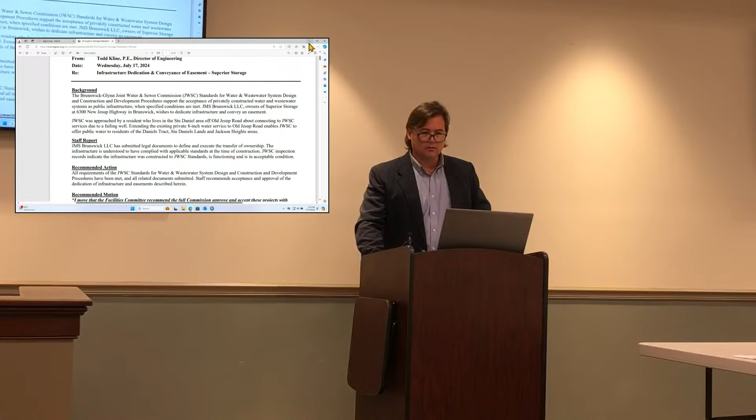I'll turn on, visualize it a little bit better.

Okay, Superior Storage business here, private water line that was installed by their forces back when this was developed, this project. It stops just short, there's two separate parcels, one parcel here, second parcel here. The water line stops just short of Old Jesup Road.

We were approached by a resident that's on a private well off of Old Jesup Road. There's currently no public water infrastructure in this location. We took a look around, trying to see how we may be able to accommodate this desired customer, and we saw this as an opportunity.

Superior Storage did install this line here as a fire line primarily, but their potable also comes off of it. We approached Superior Storage and through a lot of negotiations and communications with them, particularly through the efforts of Mr. Dormany's office, we were finally able to settle in on an easement, two easements. One easement for the first piece of property, second piece of property, and then also dedication of the water line itself. That'll get us to Old Jesup Road with a little bit more effort in-house likely for distribution, possibly to extend the water line.

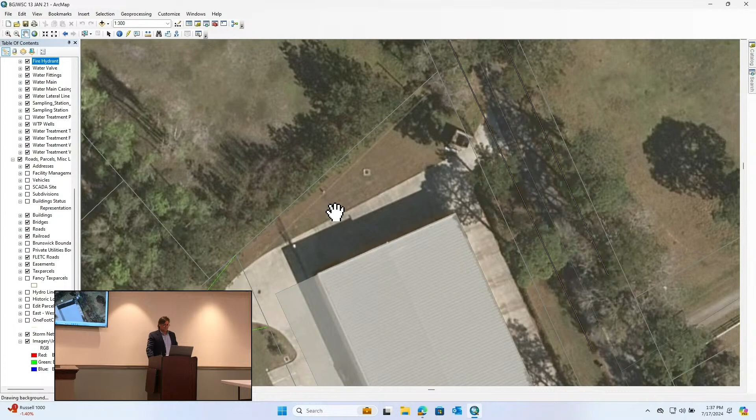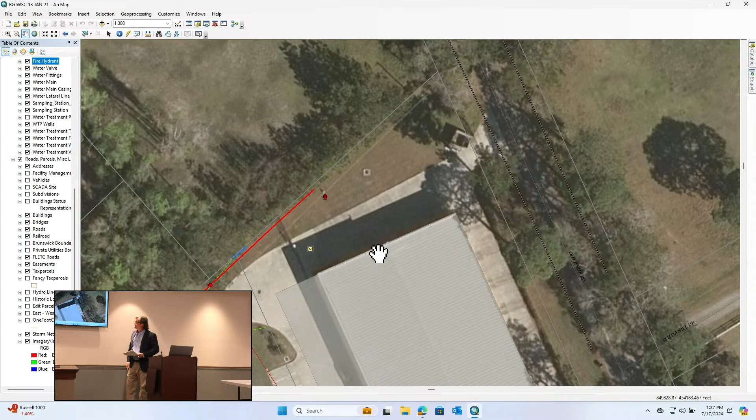Once we get the easement and the water line extend on out to Old Jesup right-of-way, then we can branch either way to pick up new customers. So that's the history and background and why we would consider this.

Infrastructure was inspected back when it was installed. Records indicate we've got record drawings for it. It's 300 and something feet, a little over 300 linear feet of 8-inch C900 PVC pipe, meets our current standards.

And then also the two water easements. Documents are included in the back for reference, two easement plats. And then tomorrow you'll see the dedication document. I don't think you'll see it in the packet today.

What year was that installed? Do you have an idea? That is a good question. It's a little over 10 years old, I believe. Okay, it's been in the ground a little while.

Can I have a motion? One thing to note, we are not getting a warranty with this dedication because they're outside of what would be the normal warranty period, because it was never going to be dedicated. So as part of the dedication, they are not providing a warranty, but given the access to Old Jesup, staff feels that's acceptable. But right now it's a private line, right?

Currently, it is privately owned and maintained. And where's their meter? If it doesn't show on here, it's a yellow dot by the corner of the building. Oh, there it is, okay.

So they use it for a fire line too? Yes. Do they have a fire meter, a fire line meter? No, sir, we don't have meters on fire lines. Fire lines are direct connections with backflow preventers on them, and they pay a monthly fire protection charge for that. Do they do that right now? Yes.

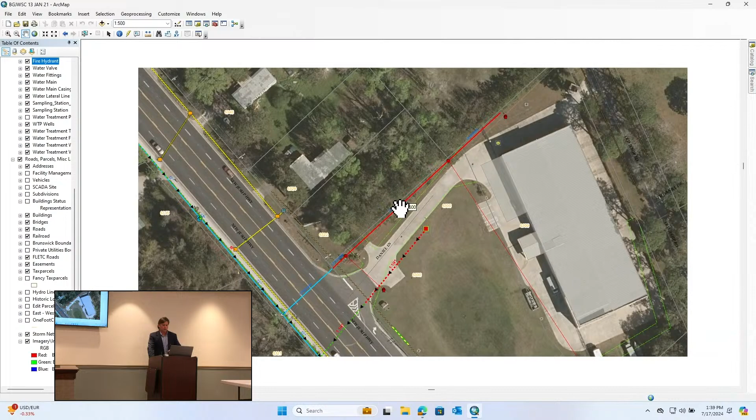Got it. Let me turn off the, maybe this will help clear it up just a little bit. There we go. So the building footprint here, Superior Storage, this is all, right now, it's a storm retainage area.

Joint water, this is public line across 341, that had to be public, right of way to right of way. Once it went on the private property side, it became private. Okay, so they've got one fire hydrant lateral that stubs off here, and the fire line extends all the way here. Another fire hydrant here at the end, and the potable meter is up here.

I would imagine they, rather than running a separate and independent fire line only, it made sense to folks to approve this plan, to at least get a little bit of usage on this line, keep the water moving. So there's quite a lot of potable using off of that. Sometimes you'll see separate independent water and fire lines run, particularly if it connects for a fire suppression system here, which I don't see a backflow in there, so.

And somebody else has already requested water, right? Yes. Somebody down Old Jesup in the neighborhood, kind of to the east there. So would we loop that line back around?

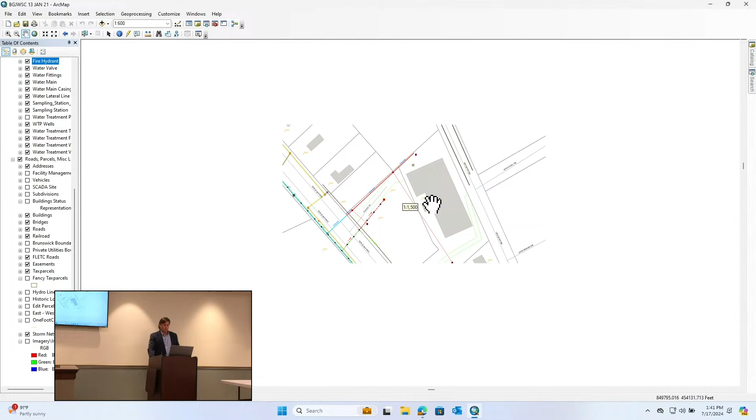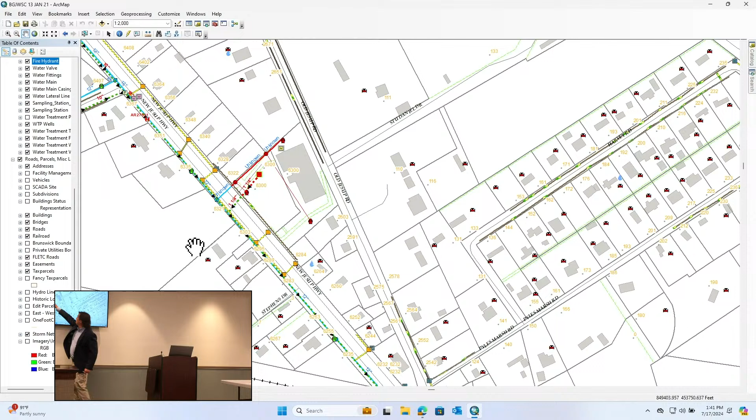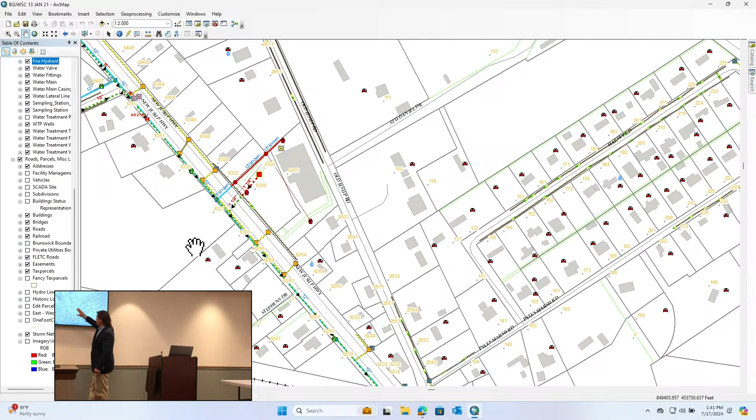Right now, it would likely be a dead-end line coming from New Jesup through here. Old Jesup, we'd stub out about that way, and then stub out down here. I don't remember the exact address, but it's one of these units here that was requesting it. They're having some issues with it though. So now they would be responsible for running the water main line to their doorstep, unless they were able to work out a common project with them. But we would probably look for a loop sometime in the future, a capital project, add it to a project list.

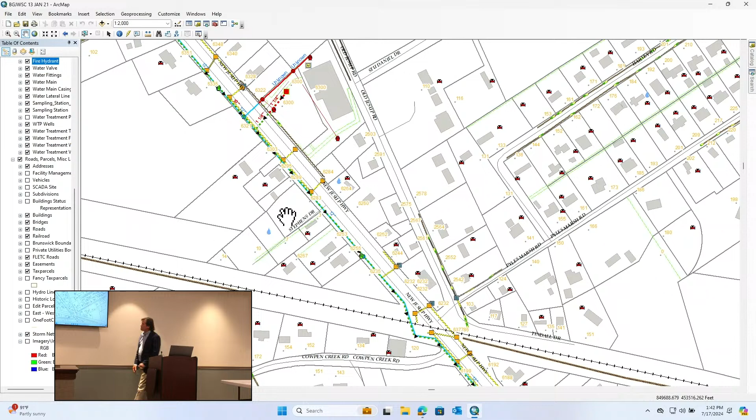Can we see where the water lines are on that map? I'm not sure what's clear on them, where the existing water lines are. Let me turn sewer off because it's kind of overlaying. So let me turn storm off too.

Is there any private water systems right in there? There are, yes sir. So if you see, when I turn sewer off, I turned off the septic tanks. Let me show you, turn it back on so it's apparent.

Stub out there, and that's it. And then you're gonna run a service line all the way to his house down Old Jesup? That would be right, so about 120 or so feet to get to the right of way.

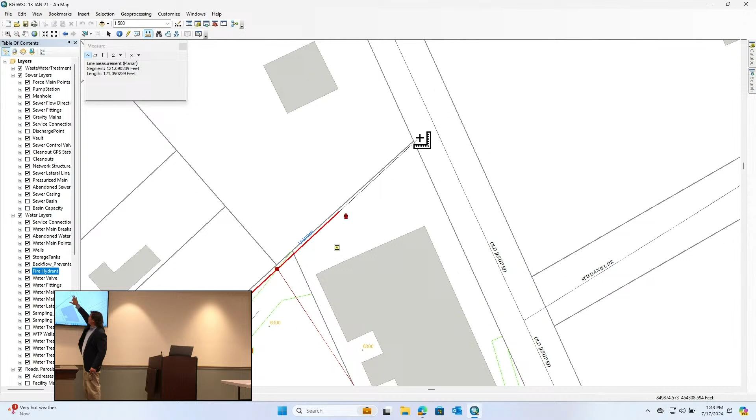So then we would have it there at the right of way, stubbed out. The customer, whenever they would pay capital fees or whatnot, we'd assist them with a right of way plan. We'd get the right of way permit. They would be in charge of extending a 2-inch or whatever it would be to get it to their doorstep.

And then at some point in the future, if we decided to include an 8-inch main upgrade or something like that to actually loop, we would upgrade the line size at that time and then retie them in when we ran by them. But right now, we don't have any plans or any funding to extend down Old Jesup to their doorstep. That would be on them to do at this time. But this at least gives them access to water.

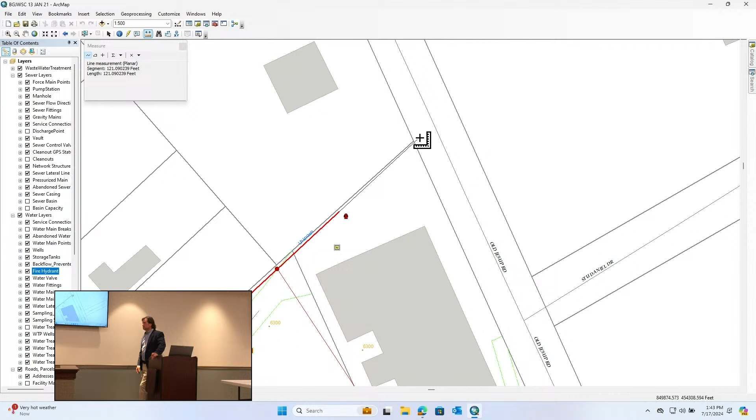Are we planning to go ahead and do that last 120 feet almost right away? That would be the next step. I think we would schedule that probably with operations, I would imagine. Maybe we'd do that in-house when they have the time. Yeah, in-house, okay, right. So we'll have it there for future use in case something happens with this person.

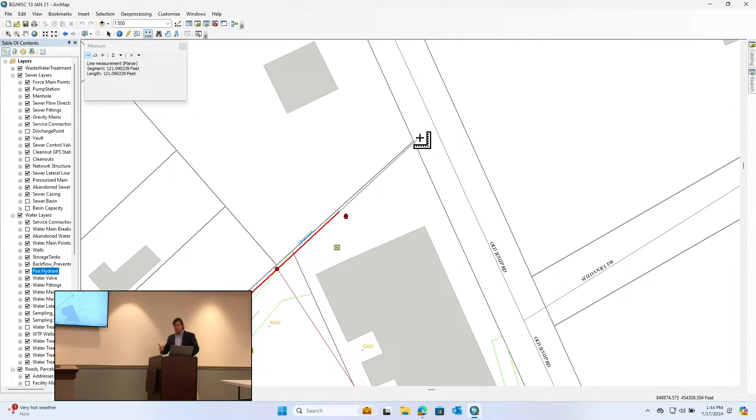Are there any other indications from any of the people who live in the area of a need for water? No one else has approached us directly, but this is what I was going to show. If everywhere you see the red septic tank icon, you can assume that there's either a private well or private community system type thing. But I believe all these folks in here are going to be private wells.

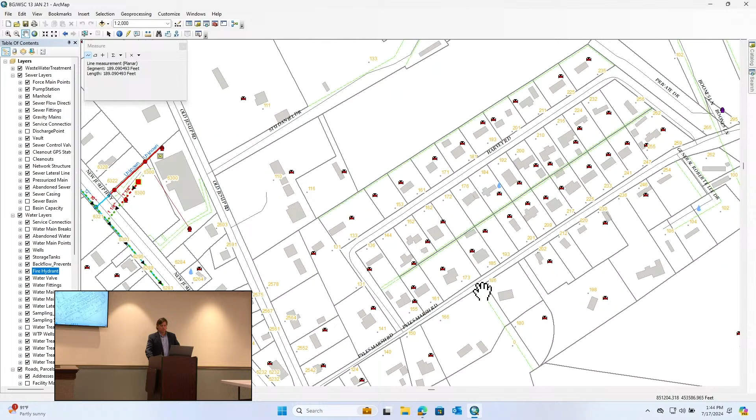So anyway, approximately where's the house that's actually, I think it's one of these two houses here. I think it's 2564. Does he know how much it's gonna cost him, and he's gonna run it all the way down Old Jesup? They would, right, until they see the cost. Could be expensive, right? It could be.

Need to get a right-of-way permit from the county. Yeah, they have to get a right-of-way permit. It's just under the 1,000-foot limit for like a 2-inch. Do it all the time.

Okay, right, we would hope we could coordinate this pretty quickly with maybe a capital project, but we don't have anything on the books. The effort is always to try to get new customers on, especially when they're in need. Their well hasn't failed, but they have a lot of issues, and they're weighing the balance between purchasing a new well versus this option.

Doing capital fees, if we did a capital project, we wouldn't just put a 2-inch line in, right? We would put something larger so we could extend fire hydrants and all that, and have greater benefit to the folks in there for fire protection.

Let me ask you this - if this person actually does the effort to put a 2-inch line all the way down there, down Old Jesup to there, would we want to say, okay, if you're gonna do a 2-inch, we'll give you a little money, just go ahead and throw a 4-inch?

What we've done in the past is in scenarios where that has been beneficial, we've provided the pipe material for them to install. If they need a 2-inch and we want to put in a 6 or an 8, we've given them the pipe, and they get a contractor to install it. Our contribution has been materials. It's a fantastic idea.

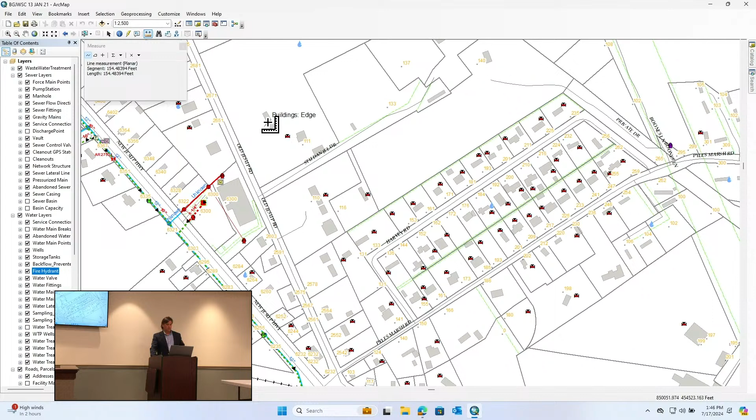But should we research whether we want to run a line the other direction on Old Jesup also, to pick up a loop to the north? Certainly one day we could do that to provide water for other customers, that could be incorporated to go further up Old Jesup.

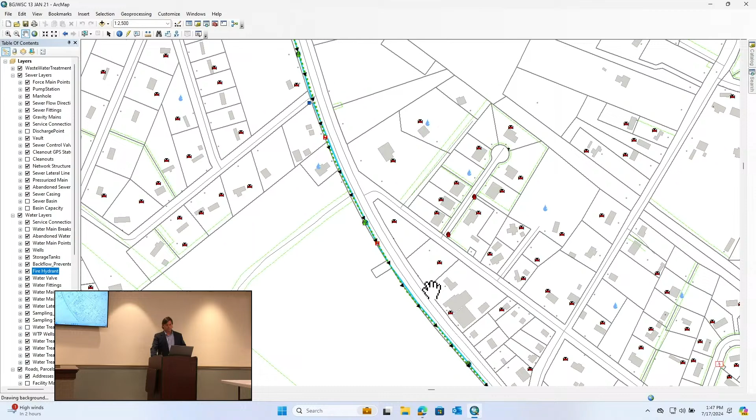I question putting in a little 2-inch line there, when you've got all these people that are future water customers. There's a lot of houses in that area. If they're all individual private wells - I believe there's a community well system in there for one of the neighborhoods, but most of them, to my knowledge, are private individual wells.

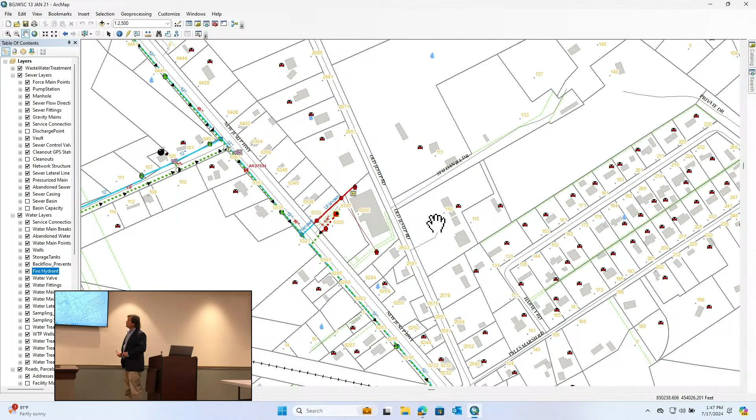Well, how can we find that out? We can find out definitely if they're community wells, and then the assumption would be if they're not community wells, they have to be private wells. I think we know who to contact to determine if they have a private community well in that area. The only one that I'm aware of, Wittersap used to own, now Water Utility Management likely would own, so it'd be a phone call to find out.

So we don't know where all the private water systems are in our county? There's a map, I just don't know them off the top of my head. Those are regulated - the ones that we know about, we have them in our layer, but we may not know all of them.

So we don't have an agreement with the property owner, nothing? He just might want to extend water? No agreement, and they have not paid capital fees, no. But we're not gonna put the other 120 foot in until they pay the capital fees. And they weren't gonna pay capital fees unless they knew that we had a line that was gonna be extendable. So they're just weighing cost of a new well versus, okay.

So actually, what we're doing is just approving an easement back to the owner that put the line in - he's agreed to the easement, that's correct. Correct, and there'll be a public water line then. Absolutely. But we don't have to tie to it right now till we get everything else straight. We're not gonna do that.

You said there was a lot of negotiation - was there some reluctance on their part? I'll let Mr. Dorman answer as far as the dedications. The interested party with the private well has routinely called weekly, asking 'Hey, can I get water yet? Can I go?' I'm talking about the storage people. Were they reluctant to give up their water line?

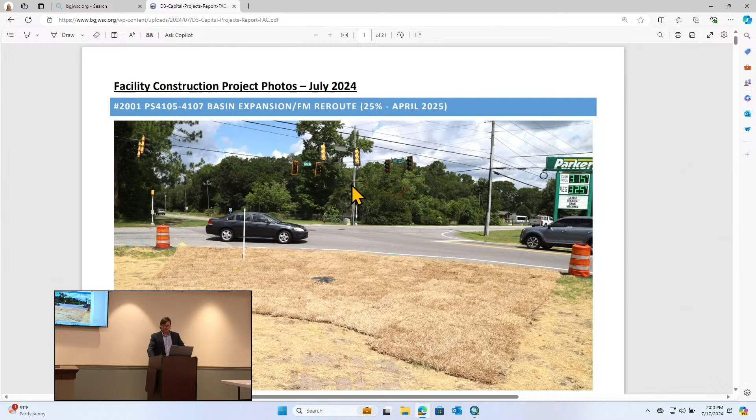Commissioners, thank you again for the chance to showcase some of the action photos from the field on projects that are in motion. First project here is 4105, 4107 Basin Expansion, Force Main Reroute, improvements at Kate Road and Perry Lane. The intersection here is the 4107 force main connection to the receiving gravity - that's the receiving gravity manhole right in the center.

It looks like a lot of dead grass, but I think he got a good deal on the grass. He needs an irrigation meter. So with the rain we recently had, it might be green now. Yeah, right now it's probably green after, not having had much rain the last few weeks. The good news is that's just dead on top, it will come up from the back, and it's in the contract for the contractor to establish green grass.

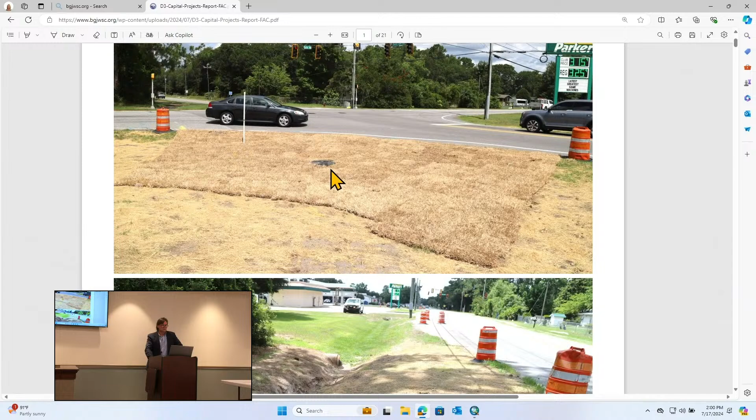So looking good there - they made a connection, had to come in and connect to that. It's pretty much a dead-end manhole right there that it ties into, and did a good job. TB Landmark is our contractor there.

Next picture shows the valves pretty much right in front of the pump station. You're looking back towards Parker's, towards the receiving manhole there. There's the inline valves, the force main at the station.

Painted nice and green. I did have a contractor tell me one time, talking about growing grass, that he said they could put anything in the ground we wanted, but he can't get grass to grow. It's the worst part of any job.

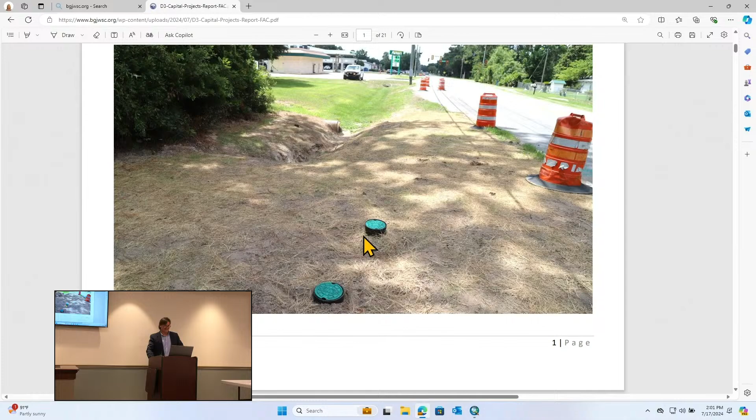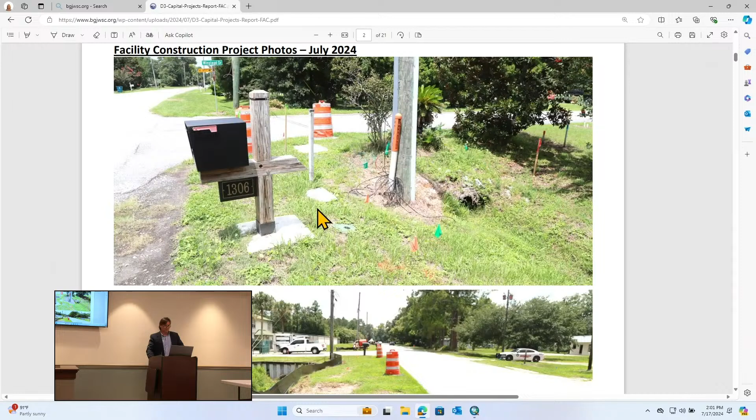Next project here is looking down the right-of-way for - well, this is actually the same project, 4105. This is the second pump station improvement, force main improvement. Got the locates done out here. This is where they come out of Winstead subdivision, and we'll make the turn with the 4105 force main upgrade, headed south down to the intersection with Old Jesup Highway, Old Jesup Road. Has the fiber already been put in that area?

Thank you for asking, your question is timely. If you look right here, this is Live Oak installing their fiber right down the right-of-way, unfortunately. So the install is being coordinated, and this is open cut. As it was bid, this section is open cut. The contractor, to my knowledge, nothing's changed with that plan as far as drilling it in lieu of - but yeah, they're going to get it in there. They're going to have Live Oak locate their stuff appropriately. So that is fiber going in.

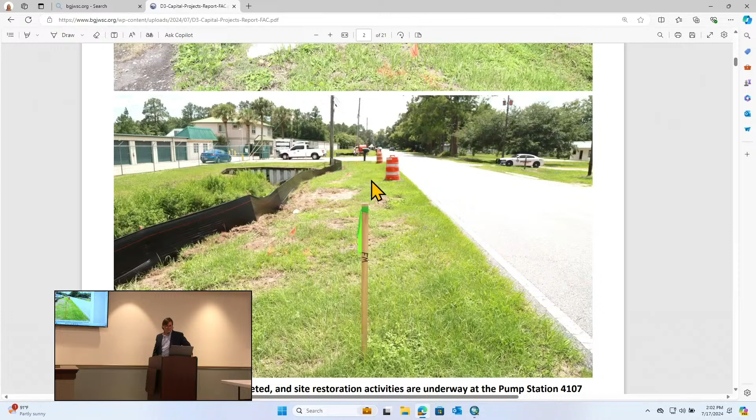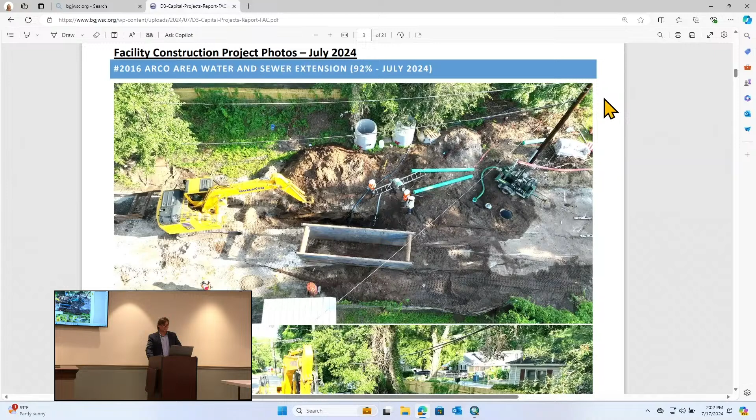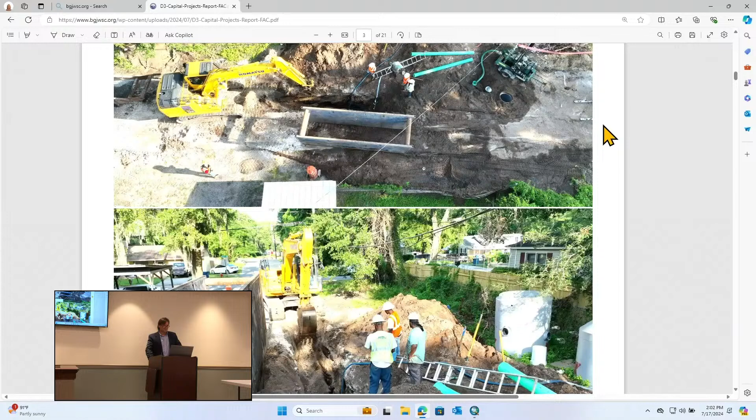Next project to speak of is ARCO Water and Sewer Extensions. You see that percentage closing in - we're getting close on this project to completion as far as installation of all the sewer mains out there, getting close to 92%. There's an overhead view of the trench box in process, dewater and pump, all that typical stuff you see on site. Excavator going, appropriate PPE and whatnot in place. That is UWS, our contractor.

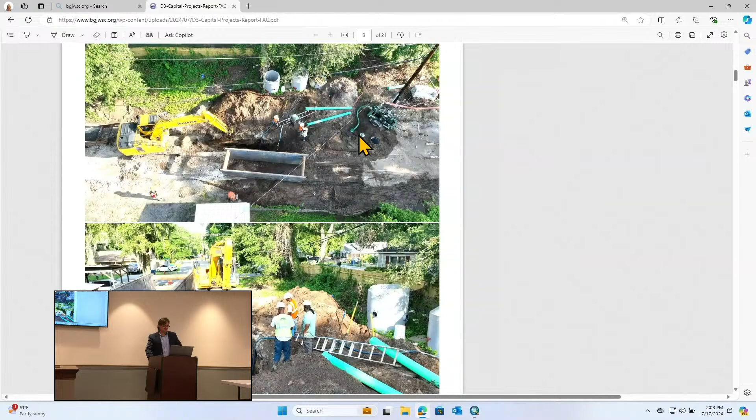8-inch sewer main. We were alerted last week that we will be receiving - well, rephrase - we have been awarded grant funding from the state DNR to help with running sewer laterals to the houses and making the connections. That still has to go through an approval process through the EPA - it's an administrative process that'll take anywhere from 1 to 3 months. So once approved, we will bid out and have a contracted price with a single contractor to install the laterals. The homeowners will be responsible for the capital fee portion, but the laterals will be a portion funded with a grant until the funds run out.

We believe we've got sufficient funding to do at least 250 homes out there, but we'll wait till the bid prices come back to see where that goes.

The capital portion for an existing structure can be financed for up to 10 years on your water and sewer bill monthly, so there's no requirement to pay anything out of pocket up front to get onto the sewer system once the grant program goes into effect. We'll put out information about that once this is approved, and there'll be a public meeting where people will have the opportunity to sign up.

Best case scenario, at the public meeting we'll have documents available for people who'd like to sign up already and potentially either pay their fees in full or get onto the financing program, so that when we have our contractor ready to go, they can hit as many of them at one time as they can. We'll get better pricing if they can get whole sections at a time instead of jumping around.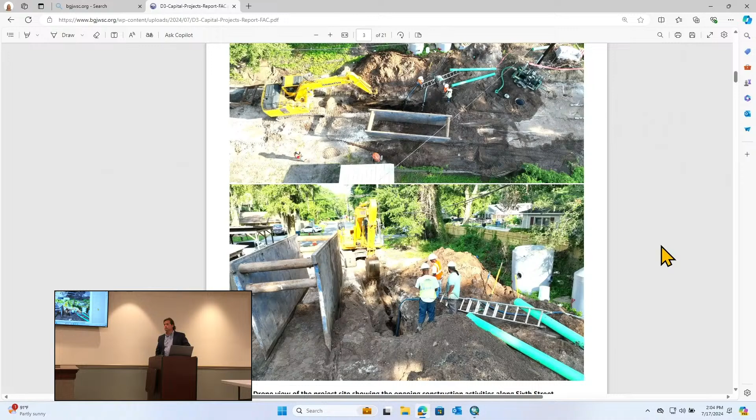Should we have a contractor's price before we have that meeting, so we know? That's what we'll do, yes sir. The goal is we'll have the contractor there at the meeting as well, so they'll know who the contractor is, we can introduce them, and they'll know who's working in the neighborhood. It's very exciting.

This is a state 319 grant. To my knowledge, I don't believe they've ever funded a septic to sewer conversion project with this grant program, so I guess we're somewhat going to be their guinea pigs to see how it's going to work. If it does work, this is an annual grant program, and the hope is we'll apply for similar funding for the Brunswick-Glynn project on the heels of this.

Do we know the approximate total length of all the laterals? Well, we know where our sewer lines are going, and we can get a general idea, yes sir. Because we had to do that when we applied for the grant, we came up with that number.

So, back of the houses to the laterals - I forget exactly what the average I used was, but it should obviously be going in those back alleyways. The unopened alleyways will actually shorten the amount of laterals we have to run. Now, we will not be demoing the septic tanks as part of this project - that will be the homeowner's responsibility to demo their existing septic tank.

And the portion that the property owner has can be spread out over how many years? Up to 10 years. On their monthly bill, so that would increase their monthly bill by around, what, $20? 18 to 20 bucks, somewhere in that ballpark, yes sir.

But a lot of those customers have told us that they're having to pump their septic tanks every 2 to 3 months. And if you're having to pump a septic tank for a couple hundred dollars, $300, every 2 to 3 months, this would be a much better option for them.

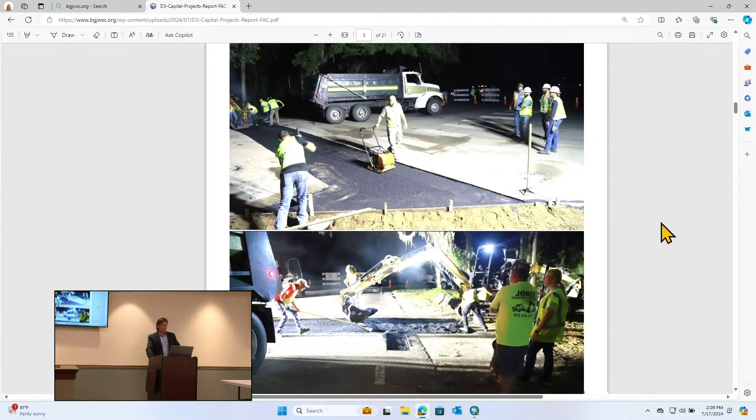Several nights of night work involved. There's paving going back in place, even capped with flowable fill. And it pretty much went off without a hitch. Very well facilitated.

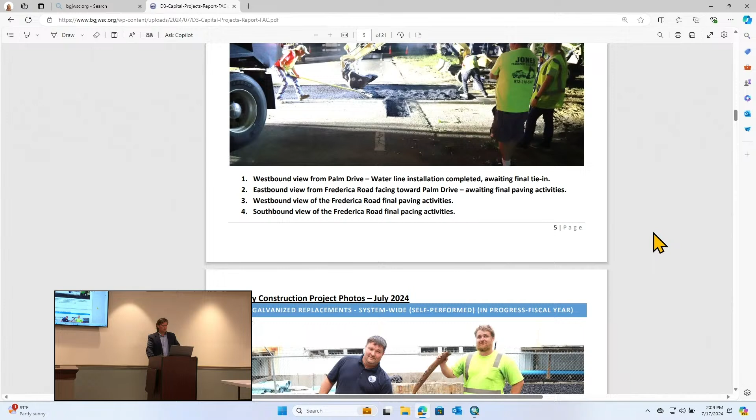Next project, galvanized replacements in-house with our operations staff. Good shot of the team there, water distribution. Is that the whole team? That's most of them. I don't know that everybody was there that day, but that's the vast majority. Yeah, look at all the smiling faces.

And how many of those are working on the galvanized line replacements? On any given day, 5 to 6 of them are probably working strictly galvanized, but all of them rotate through the project. Okay, so all of them get part of the fun. They get all the fun, that's correct.

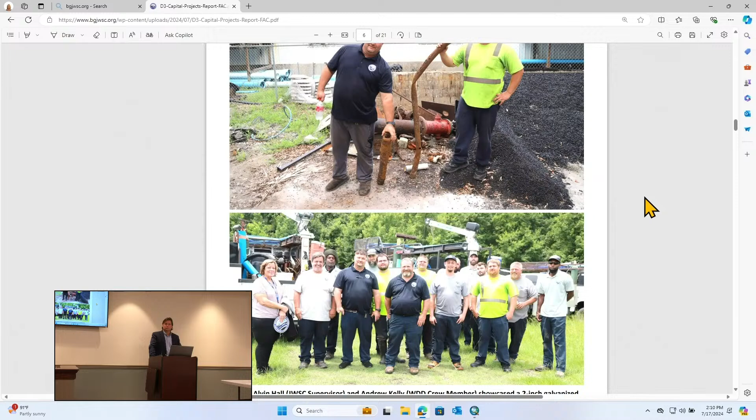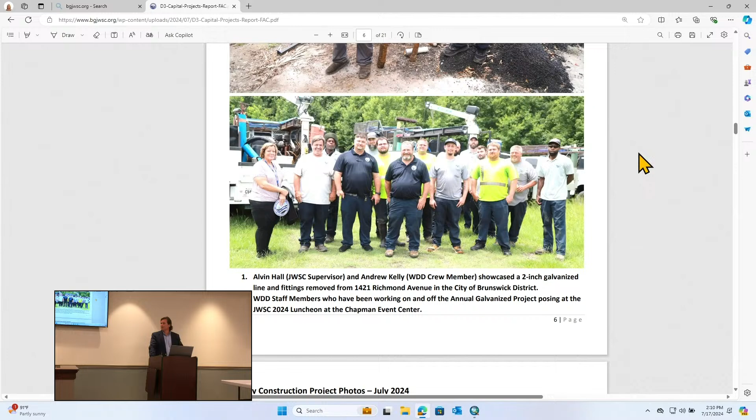So they're finishing up Wesley Oak Circle, which is a separate project. Once they do that, they're going to go back into El Dorado, Menendez, Rivera Drive. There's a loop they've got to make in there as the next galvanized work they'll be completing. We've received some communications from folks in the neighborhood, interested parties, and we're happy to report that they should be having some noticeable improvements with these lines tying in.

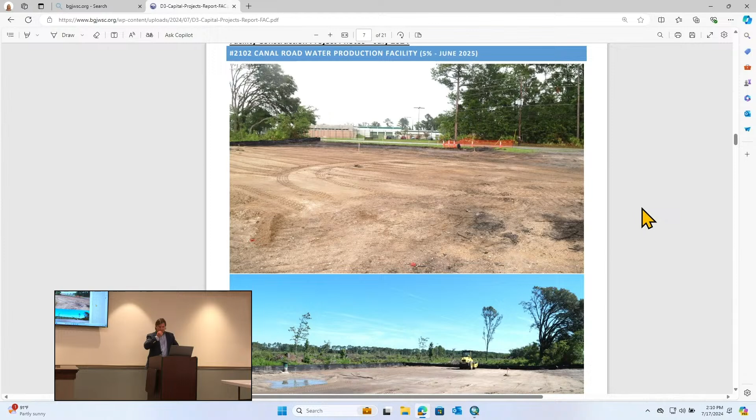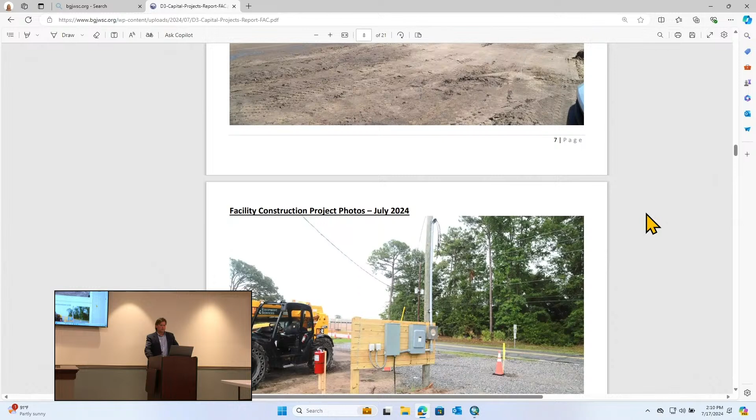All right, next project to speak of, Canal Road Water Production Facility. If you've been out in that area, you've seen the site is cleared and for the most part graded, with most of the dirt work completed. Our contractor Reeves Young out there doing a great job so far. We had a good last permitting meeting with Glynn County last week, sorted out a little issue there, and we're full steam ahead again on this project.

So we're looking to see maybe the tank subcontractor do the pre-stressed ground storage tank, coming in late September, maybe early October. We should start seeing some really good, visible things happening out there. If you've never seen them build those pre-stressed concrete tanks, it's an interesting process they go through.

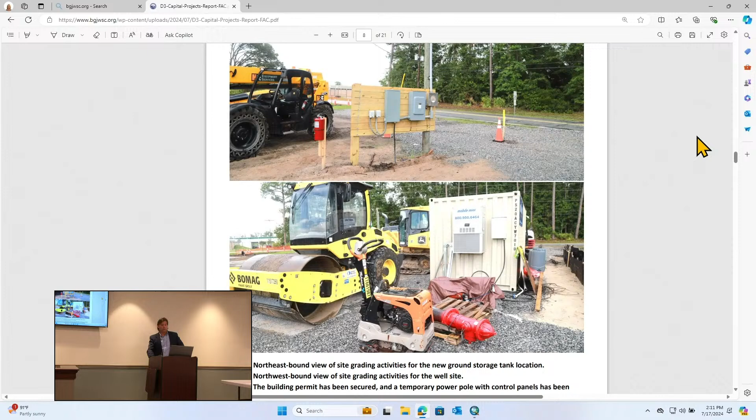Very cool, stretching a piano wire or a guitar string. Yeah, it's really pretty interesting. They go to tighten it up and tell everybody to back up - that thing snaps, and I'm not sure we're going to be far enough back. They literally take a skidder with a spool of wire once they get the tank formed up and shotted, and they stretch that wire with a skidder all the way around. They do it in phases, but pretty much if that thing lets loose, you know what happens, so everybody does stand back for sure. But it's a really cool process to see, and it makes a really strong tank - that's why I call it pre-stressed. That wire is stretched when they set it in concrete.

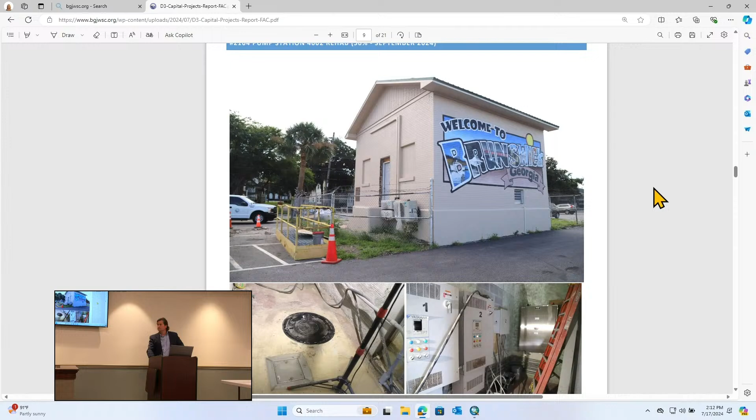All right, next project to speak of is our pump station project, and this first one is pump station 4002. What did they do on that project? All the demo work and internal wall and floor rehab is nearing completion inside. What's left is the electrical. I believe all of the submittals and whatnot to this point are completed, and we're just waiting for the contractor to receive all the electrical components. So the electrical that we're looking at there, that's gonna be replaced?

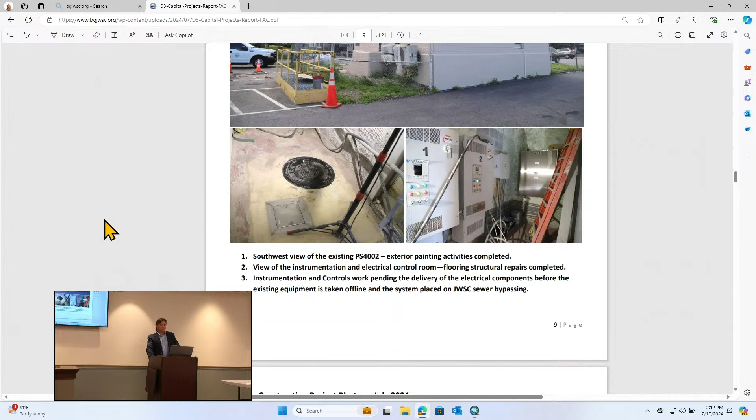Yes, and they built a separate interior with a new wall, and the electrical components will be separate from the rest of the building interior. When we have structures like that, we like to keep the electrical rooms separate because they need to be conditioned a little bit differently than the rest of the building.

Is that little mini split outside new, or has it been there? Is that AC there? I think that's new. Yeah, it looks new.

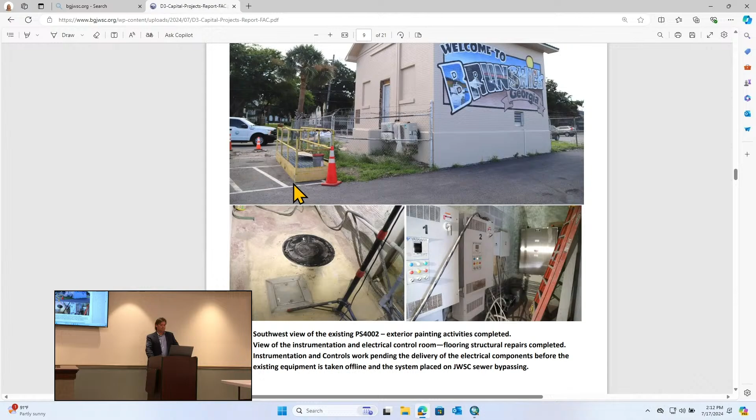This picture is one of the details of the project that was needed: access to this dry pit wet well. The slab of the building actually covers up part of the wet well where the wastewater is collected and pumped from. So this is new access, much safer access and level control instrument access than what was there before.

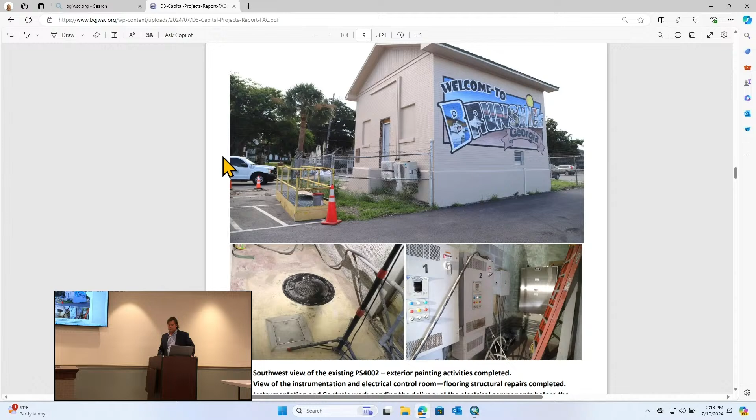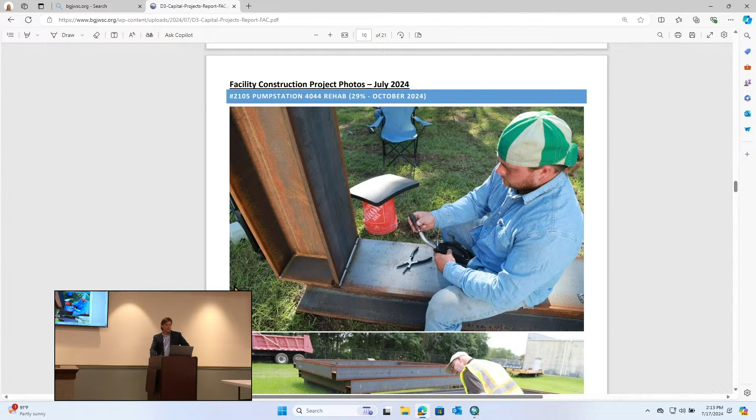Decent amount of concrete work in this project here for 4002. Okay, next project is pump station 4044, out there by Walmart and Publix, next to Brakes for Less.

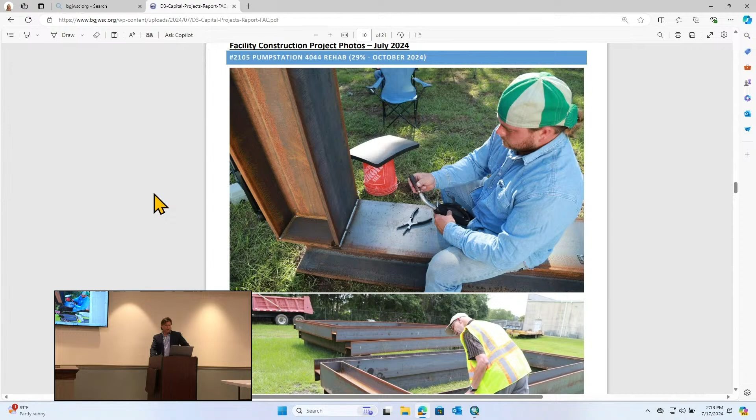Our contractor Popco is welding up their supports for their trench boxes. They're actually utilizing our site there at the mall tank. There's a lot of grassed area out there that they can safely store and lock up materials, so they're utilizing that and trucking it as needed to the actual project site.

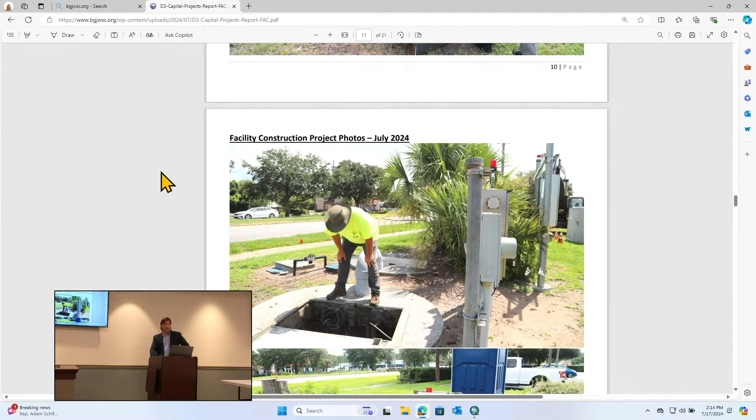How deep is that pump station? This one's about 25 foot, I believe, to the invert.

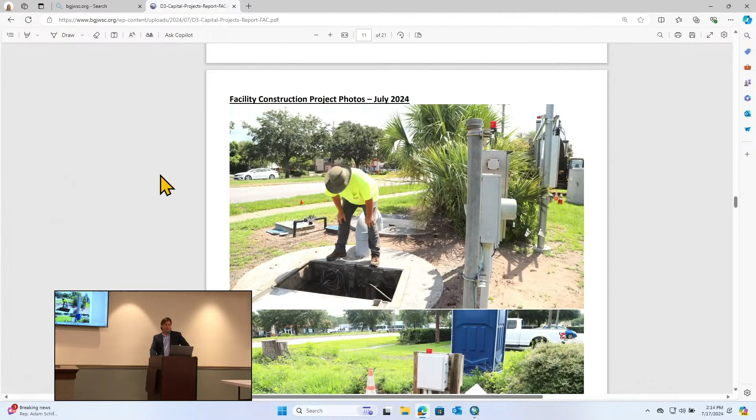They're putting the shoring 40 foot, right? So the trench shoring is going to be 40 foot deep. They're driving the piles, I think that's what they said—two 20-foot sections welding together. Wasn't that what they were going to do? Yeah, let me get back with you on that, if they're going that deep.

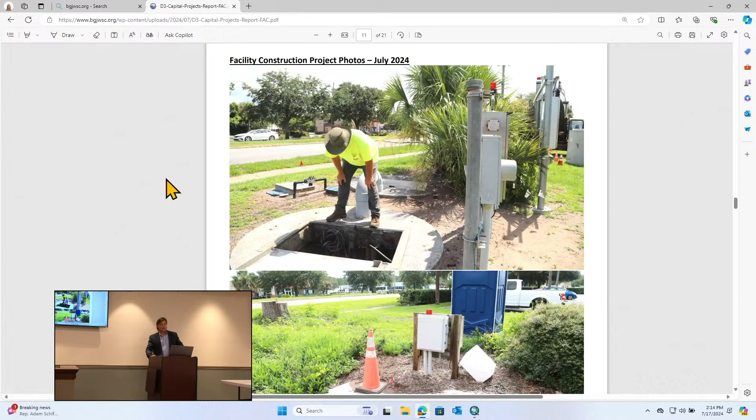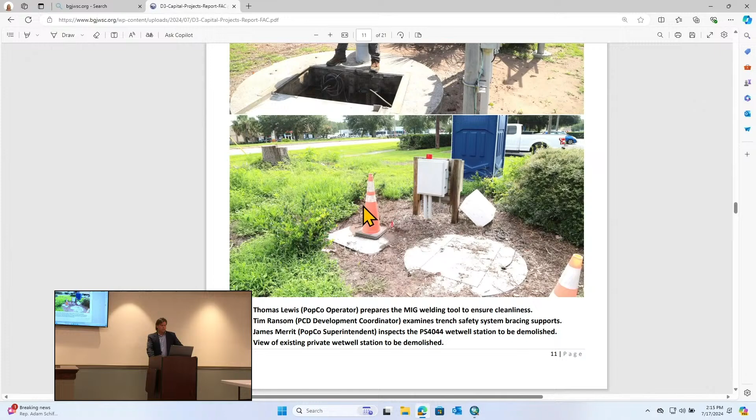This next picture is the existing station that's going to basically be turned into a receiving manhole. The one on the very bottom is the private station. It's going to get decommissioned and passed through gravity directly to our new station, which was part of the agreement with our neighbors there for easements and property acquisition.

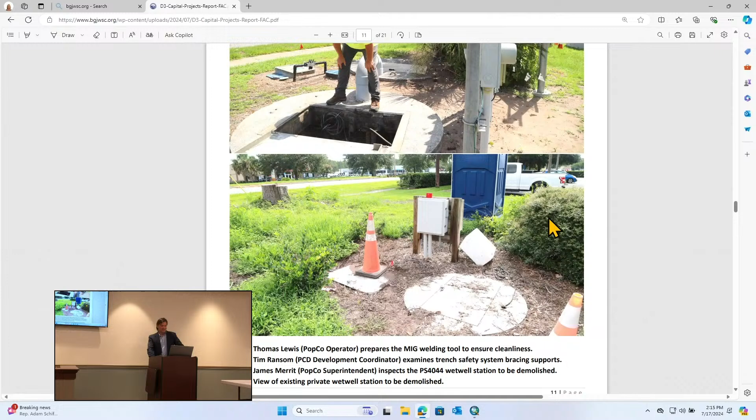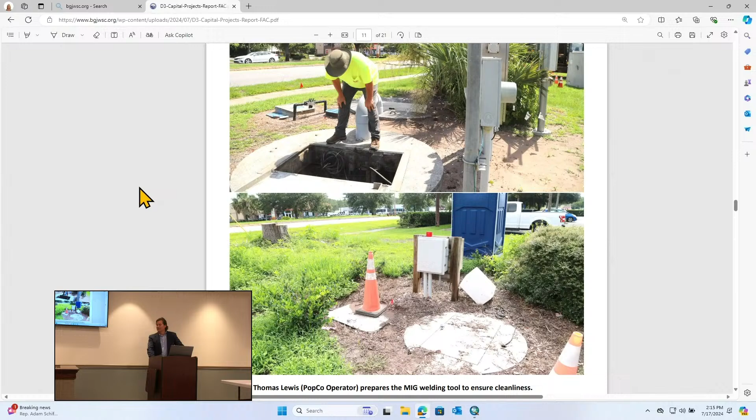Did we add that porta potty, or was that there? That is a permit contractor requirement, agreement, yes. They have to have their own facilities, although it's kind of funny to see that next to the other facilities. You may have to put a quarter in to use it, though. And they do have to be secured when they're not on site, because it's presumed to be a community asset apparently, in the middle of the night, I guess.

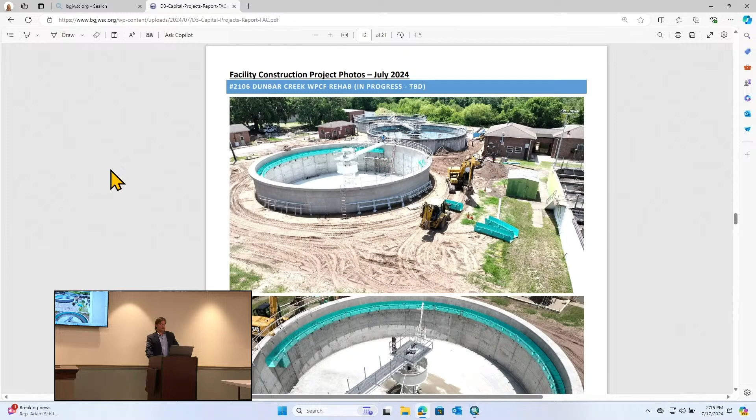Next project is Dunbar Creek Water Pollution Control Facility. Well, that's looking good out there. That structure—the clarifier—is essentially complete at this point. They did the mechanical startup on the clarifier yesterday, and everything went smoothly there.

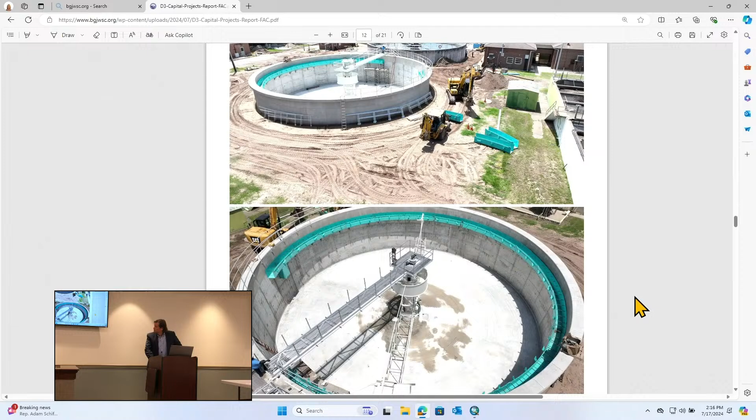The remaining steps to get water in the clarifier are making the tie-in in the new splitter box, which is right there at that bottom picture—an exciting bypass scenario to get that online. But BRW has a plan, so that should go well.

We're waiting on the gates. The gates should be in this week, so they should have those installed next week, and theoretically start bypassing sometime either end of next week or first of the following week to get water into the new sections of the splitter box. Then we'll fill up the clarifier, make sure it's running effectively, and take one of the other ones down because one of the skimmer arms has dropped and is broken.

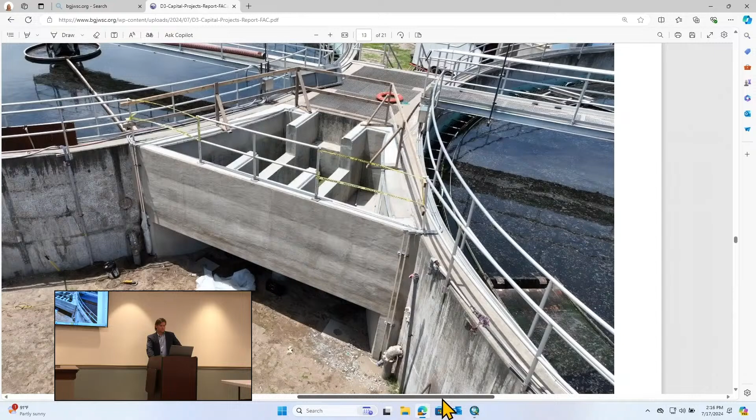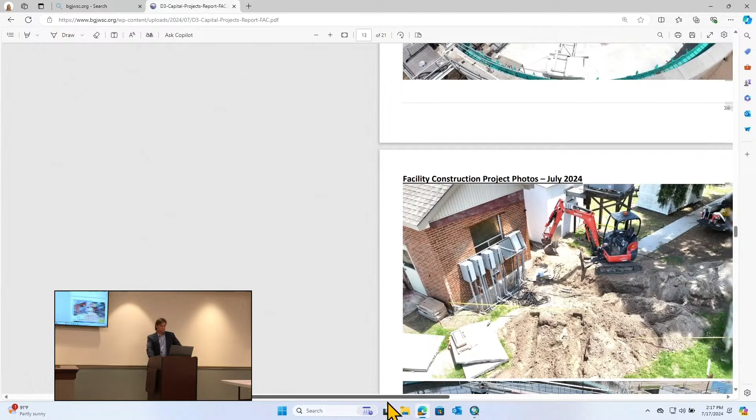So we need to take it down to work on it, so it'll be effective there. Final SCADA work is set to be completed next week, including the DO control loop for the blower, and at that point we should be able to automate our blower controls to make sure we're not over-oxygenating the water. Original estimates were we'd save somewhere between $30,000 and $50,000 a year at that plant due to automated blower controls.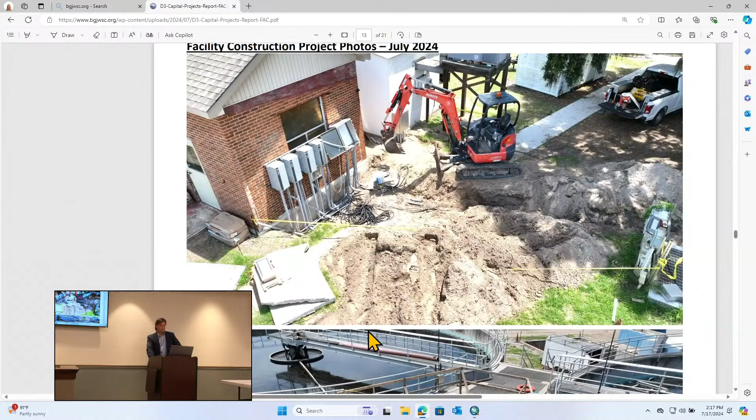So we're getting very near the end of the work there. We've got permitting activities ongoing for the roadway and for the actual discharge permit expansion. Once those are completed, the roadway improvements can be made, and once the expansion permit is completed, our daily permitted flow will go to 5 MGD. We will be getting a phosphorus limit, so the engineers are working through necessary changes for treating phosphorus, which is likely going to be chemical addition to precipitate it out.

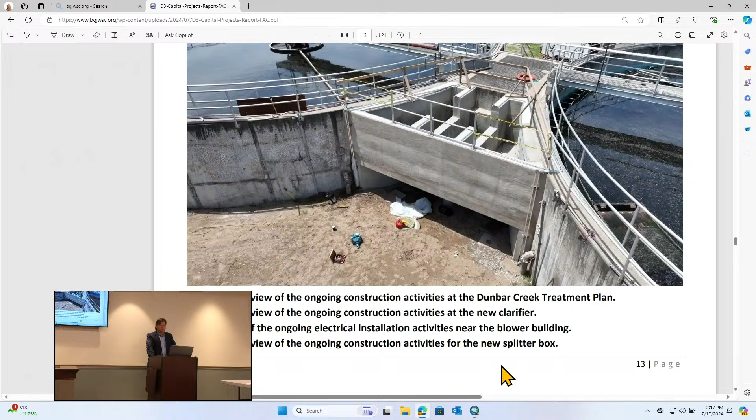Maybe we're able to reutilize the old filter structure to house our phosphorus equipment. That'd work well for that. Very cool, repurposing.

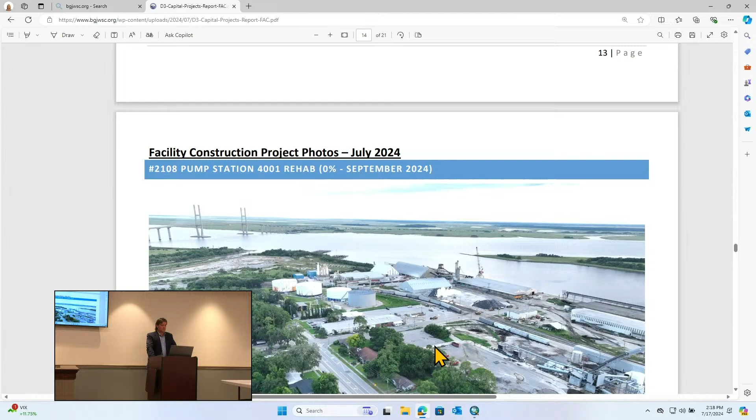Next project is part of the 3 pump stations, but it made its way down here towards the end. 4001 is just a screenshot, no work really of any extent has gone on down there yet. This is just an aerial view showing the port, Logistec and whatnot down at the very end, the south end of Brunswick, with a beautiful bridge in the background.

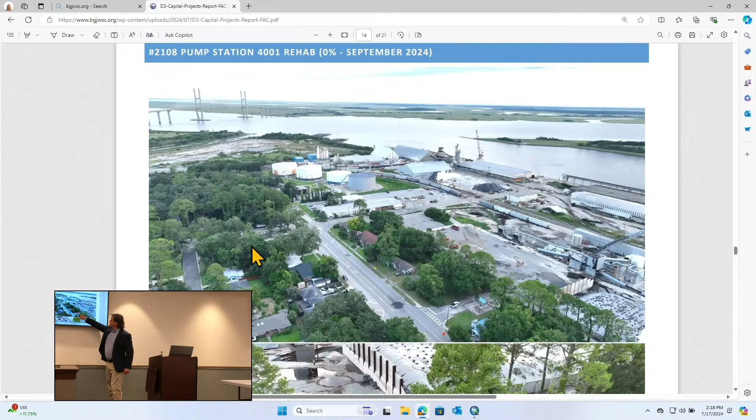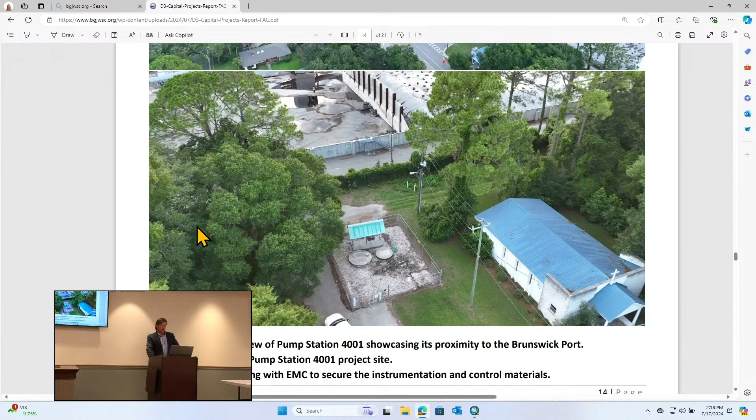Pump station 3101 is a very busy pump station, and as Mr. Burrow said in his report, it's going to get a lot busier with all the development going on the south end right now.

There's a direct overhead view of the site itself. As we mentioned last time, there's a service pole that comes from this transformer service line to the station, but there's also a service drop for this telecom facility that comes right across the top of our pump station. That's part of this project being relocated right now, so our Vac-Cons can get in there safely.

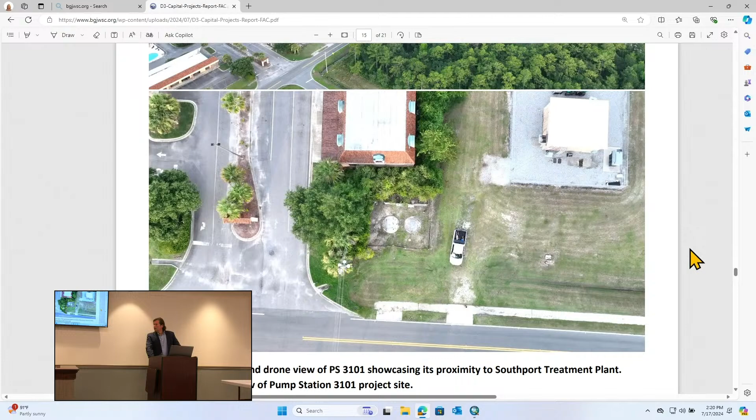They actually started building the residential area right next to the townhomes - yes sir, commissioner, exactly. These are all under construction on this side, and on this side too there's going to be storage, and townhomes on the backside. We've got more property through here, so maybe that's the next phase. They're coming along. The school is just to the right of the photo - that grassy area is the front lawn of the school.

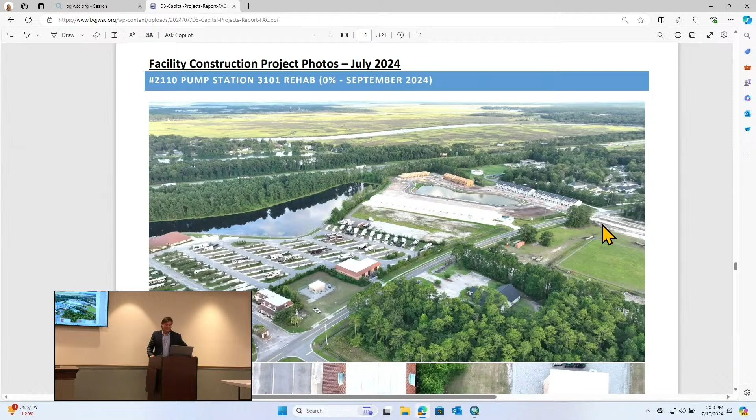I'd like to point out our Southport tank site, right there. So a lot of changes to that view coming up in the future, next couple of years.

Speaking of tanks, Small and Oglethorpe tank sites - hopefully we're going to receive a final pay request from our contractor, Tank Pro, on this job so we can evaluate and close this out.

Paint jobs are looking great. How much do we get paid for those antennas on that tank? For an individual tank I don't remember, but we bring in about 350,000 throughout the year from all of the tank sites.

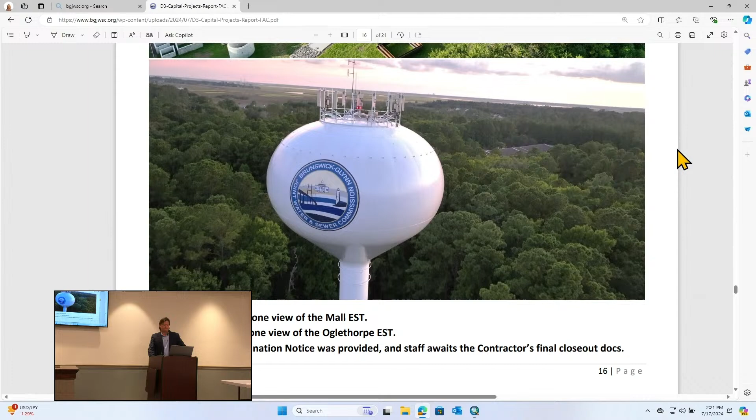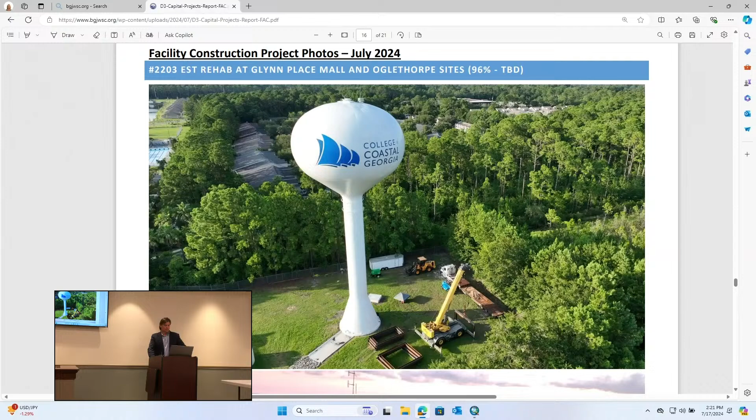There's another shot - you can see Popco utilizing the tank site at the mall as a lay yard for their project at 4044.

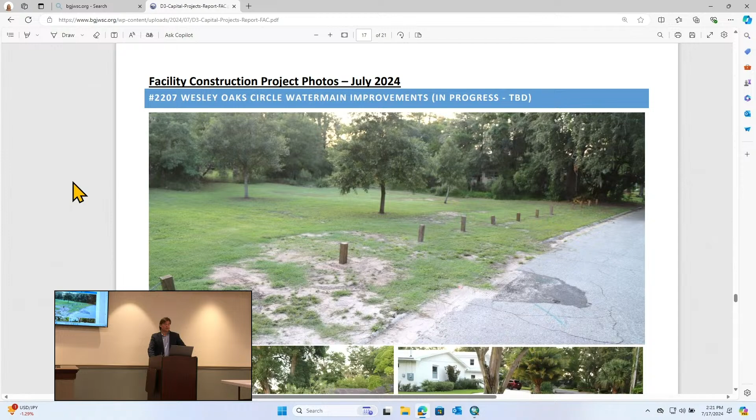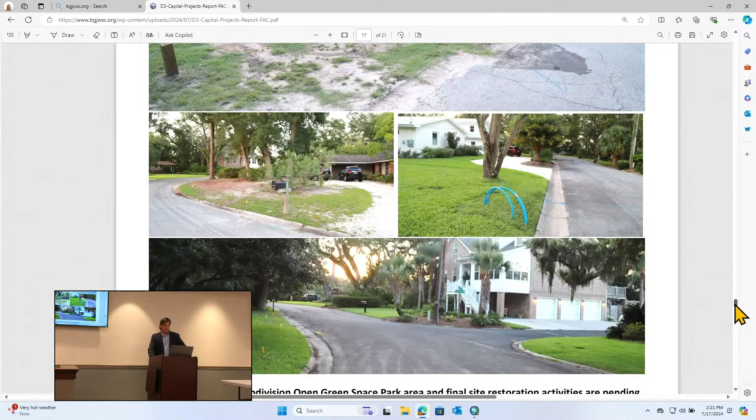Okay, Wesley Oaks Circle water main improvements. This internal project had the mains put in by DNC Directional Drilling trenchlessly. Our crews are making the tie-ins, and they're having to relocate some palm trees out of the way where a tie-in is necessary to avoid having to cut a curve in the road, which is going to be a challenging traffic situation.

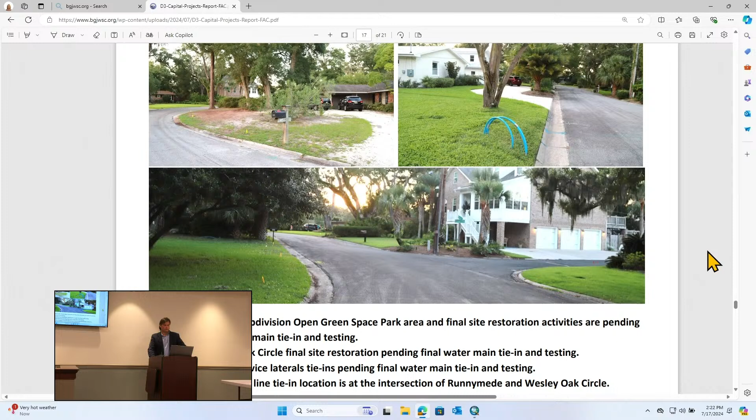That work was supposed to be done this week. I haven't checked with staff to see if that's been completed, but once it's done we'll do all the chlorination and get it flowing again. That's replacing a 6-inch main that had two 2-inches coming off the side with an 8-inch through the center with 6-inch loops, so it should have much better flow and pressure in that area.

Okay, that completes the pictures. Then we have the rest of the information as typical, included there with detail.

We did complete the 10 transfer switch installations for the first FEMA project, going through the FEMA paperwork process with that now. Anytime you do a FEMA project, there is a litany of paperwork that is required.

So we're doing that so we can request our reimbursement for that portion of the project. All 8 of the permanent generators have been delivered, and we're finalizing with Chatham Engineering, our electrical engineering partner, the bid documents now for those installations. They're having to get some work done to design a support system for the big generator and transfer switch where it's going to go on the wastewater plant site. It's a very large generator that's going to be located there.

We will be working to temporarily connect one of the new generators at Academy Creek because the 450 kW generator that was currently on site has reached the end of its life, and there's no reason to pour money into it when the new one is sitting outside the building and we just need to run cables to it and get it tied in.